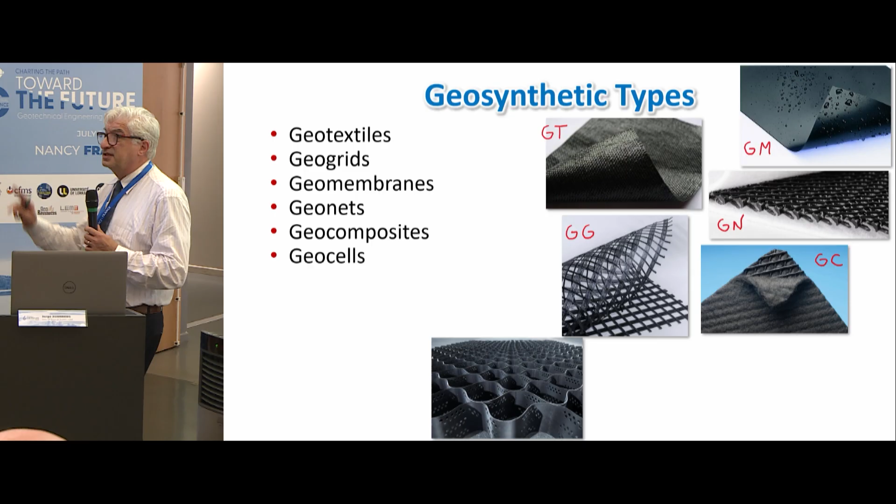Geotextiles: this is a textile, but if it is not used in a geotechnical project, it's not a geotextile, it's just a textile. A geotextile is an industrial textile, and what makes it a geotextile is that it's used in geotechnical projects. Geogrids, geomembranes. I'm not going to tell you what they are, I'm just going to tell you their names. Geonets. Geocomposites, more than one geosynthetic in a single product. Geocells, probably one of the few non-two-dimensional geosynthetics. Geosynthetic clay liners, composites of geotextiles with bentonite, erosion control products, and many others.

In addition to the geosynthetic types, I need to tell you about the geosynthetic functions. And this is key. This is key to the understanding of geosynthetics, and I believe that is another important contribution that geosynthetics may bring to geotechnical engineering at large and to the understanding of soils. What are the geosynthetic functions? This is what we are going to use geosynthetics for.

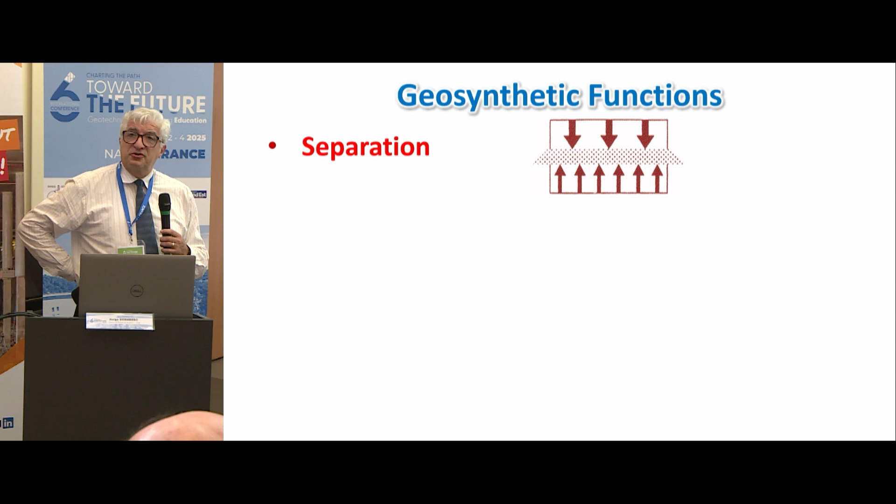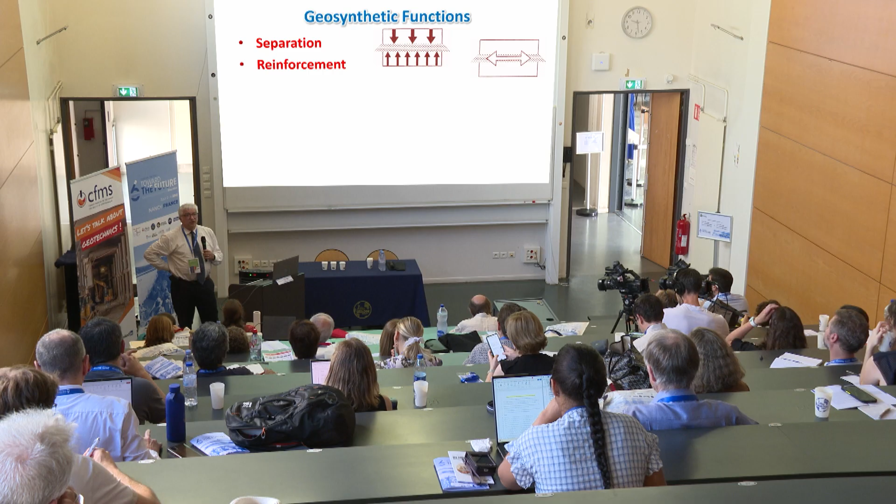We can talk about some mechanical functions of geosynthetics, including separation. We are going to use geosynthetics to keep different materials, different geomaterials, different soils separate. And reinforcement: we're going to develop tensile forces in order to minimize problems related to stability. And stiffening: we're also going to develop tensile forces, but in this case to control deformations. And then we get into the blue geosynthetic functions, the hydraulic ones.

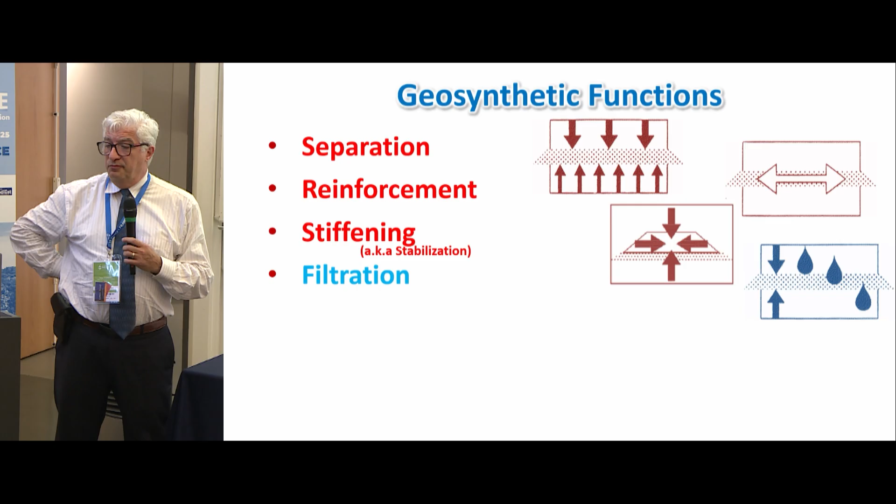We're going to talk about filtration. In this case, we're talking about flow across the plane of the geosynthetic. We want water to get through very easily, as in any filter, as in a granular filter. We do not want particles to go with it. And barrier, we want to prevent the infiltration of water. And drainage, we want the flow of water within the same plane of the material. And protection, we want to minimize problems associated with defects from the contact of two materials. For example, a gravel in contact with a geomembrane, we need to protect it from defects. All right, so we talked very briefly about types of geosynthetics and their functions.

So I want you to get to a survey before telling you that we need to get a better exposure of geosynthetics at the undergraduate level. I want you to get into a survey on how much of this we're already doing. But before knowing how much we are exposing undergraduates to geosynthetics, I had to understand what is the structure of geotechnical engineering in civil engineering programs.

So before telling you about geosynthetics, I'm going to tell you something broader, and that may be relevant for many of us in this conference, which is, where does geotechnical engineering fit within civil engineering? So I conducted a survey, and the goal was how geosynthetics are taught, but we are first going to get into how geotechnical engineering is taught.

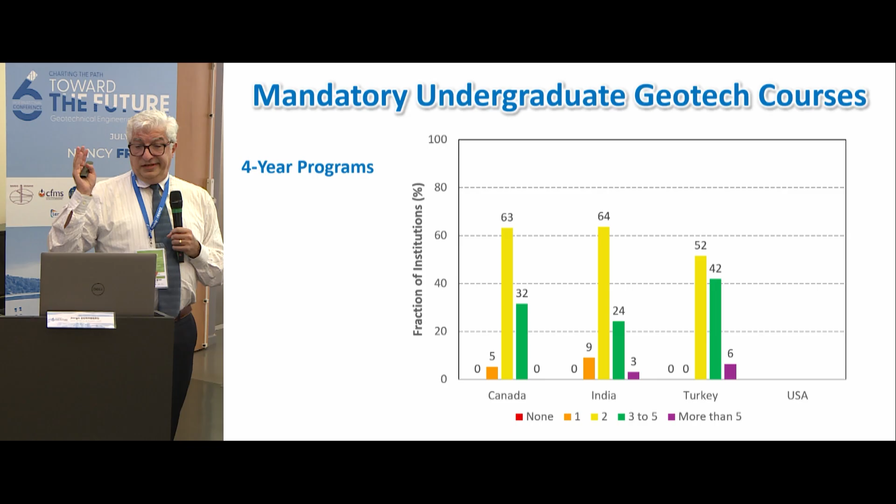Then we get to Turkey, even better, because essentially 100% offer at least 2 mandatory courses in geotechnical engineering. And the big problem is the US. In the US, I consider it staggering. A staggering 7% of institutions do not offer mandatory geotechnical engineering courses to their students. So, a student may graduate as a civil engineer without receiving any exposure to geotechnical engineering.

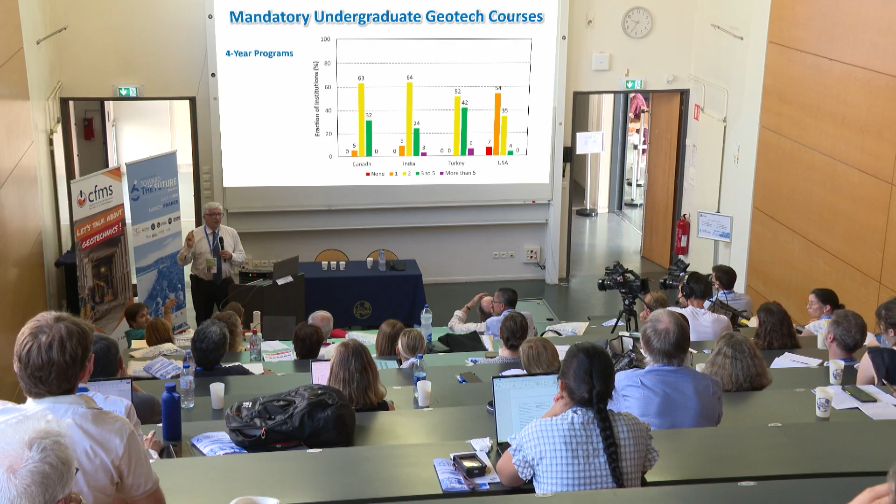The rest, 54%, the great majority, receive 1 mandatory course in geotechnical engineering, and then we have 2. This is 4-year programs. Let me show you, again, mandatory courses, but now in 5-year programs.

As a reference, I'm showing you here, there. How does this work? Here. Here. So as a, no.

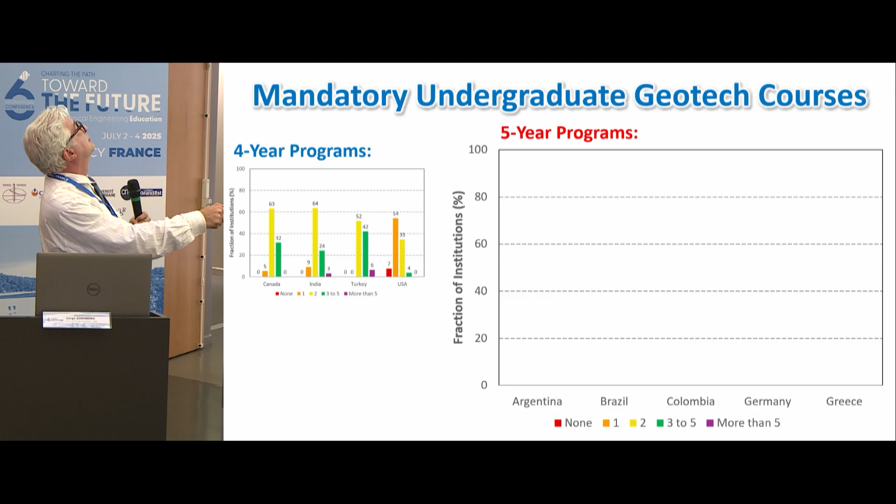Okay. You have as a reference a previous graph. And now I'm going to show you the 5-year programs. So Argentina, 5-year programs, but not significantly better coverage in terms of mandatory courses in geotechnical engineering. 58% teaches 2 mandatory courses in geotechnical engineering. Much better in Brazil, 56% or more, and Colombia offer 3 or more mandatory geotechnical engineering courses. When it comes to Germany, we're again back to 2, which is not that different in terms of mandatory exposure to those in 4-year programs.

And then the outlier is Greece. The outlier is sometimes in the good sense, sometimes you're going to see in the very bad sense. 100% of the programs surveyed in Greece offer at least 3 mandatory courses in geotechnical engineering. Okay, so here I'm going to just regurgitate a little bit what I just showed you. So there is a predictable but clear pattern. Programs with longer duration tend, but not necessarily do have, more mandatory courses in geotechnical engineering. Sadly, some four-year programs even lack a single mandatory course in geotechnical engineering.

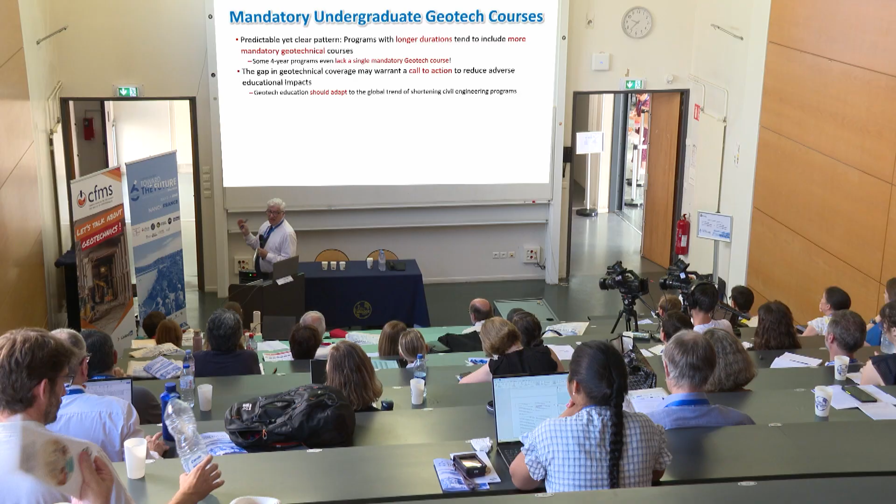Now, I would contend that we cannot fight, and also in my informal review, I believe that many countries are going from 5-year programs to 4. Some countries have gone from 6 to 5. The tendency is to shrink the length of the civil engineering program. And we cannot reverse that. I could say, rather than fighting that, as geotechnical engineers, we need to adapt. So we need to adapt to the trend of decreasing the length of civil engineering programs.

And this shift is irreversible, but certain topics need, and maybe I'm back to the concept of threshold that Jennifer was mentioning. What is the minimum that we expect civil engineers to receive in terms of geotechnical engineering, including some subspecialties within geotechnical engineering, such as geosynthetics? Okay, so this is mandatory. To be fair, but it's more difficult to interpret, I'm going to also show you data on the elective. A number of elective courses in geotechnical engineering, but this is harder to interpret without keeping in mind, in context, how many mandatory courses have been observed. But I think that we can draw some conclusions.

Elective undergraduate geotechnical courses in Canada, I could say a dual, either almost nothing, no additional geotechnical courses, or potentially more than 5 additional technical elective courses. A fair amount, a healthy amount in India. We're in 4-year programs, so we're compensating for the small number of mandatory courses. In Turkey, also a healthy number of electives, and also in the US. Quite similar pattern in all 4-year programs in terms of elective geotechnical engineering courses.

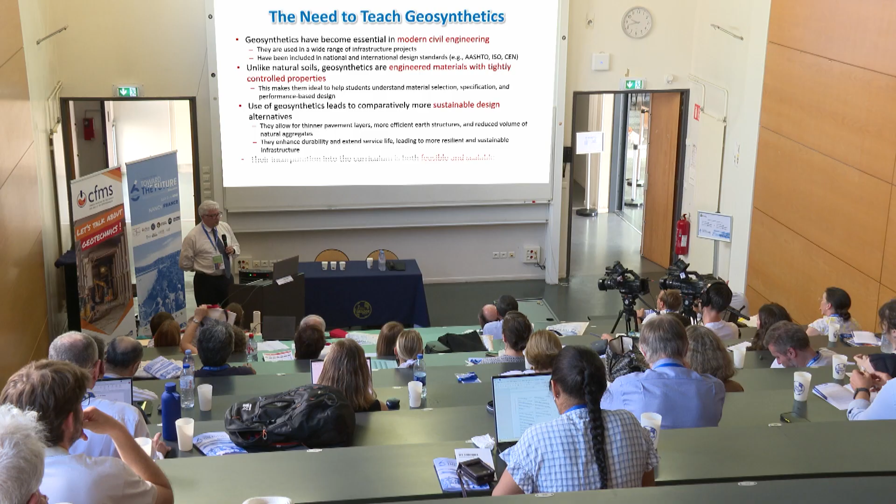It could be argued that the topic of sustainability is more and more important, and there is a lot of research indicating that when using geosynthetics, we end up using less aggregate, thinner structures, and consequently, typically, a lower carbon footprint than alternative solutions not using geosynthetics. And I could say that we're not talking about something that cannot be done. It's definitely feasible, and I will show you some examples. And it's scalable. By scalable, I mean that you can offer just very little or decide to offer more. But it's very doable, and you can choose what is the right size and fit for your program.

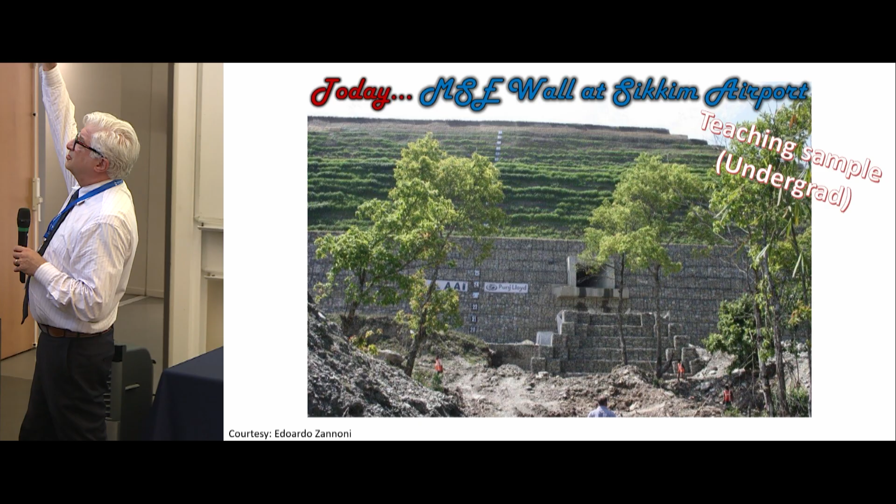So, for example, from time to time, I'm going to show you teaching samples of slides that I use in my courses. For example, I tell my students that the use of geosynthetics in geotechnical projects can be in extremely important projects. What I'm going to show you here is what I understand is the tallest geosynthetic reinforced wall in the world. It's in Sikkim Airport in the Indian Himalayas. And we're talking about a structure that is 80 meters tall, 80 meters tall. And it's so tall that it's even hard to take a good picture of it.

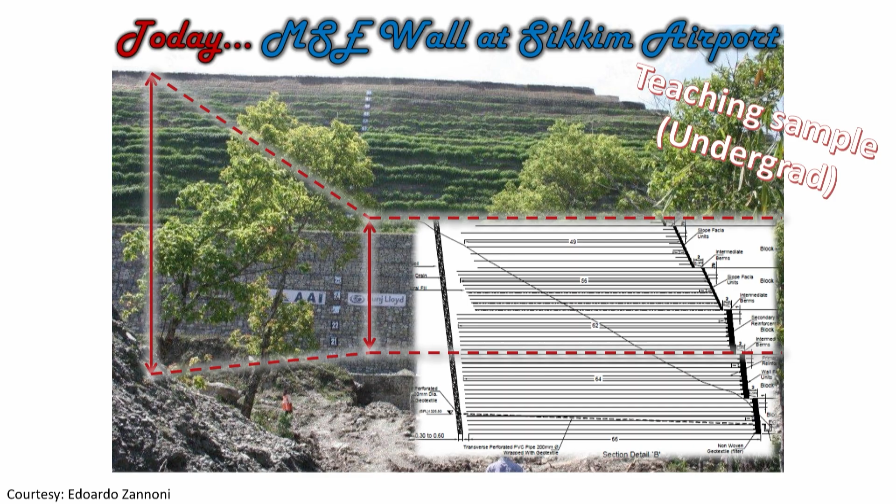So for example, here we see in this picture 3 terraces of the retaining structure. What you do not see is that there are 2 additional terraces that I'm not showing you here. And what you also do not see is that this picture was taken during construction, so there are 3 additional terraces in this structure. A massive retaining structure. Again, as far as I understand it, it is the tallest reinforced soil wall in the world.

First, I just mentioned curriculums tend to shrink in length, and the number of topics that we are necessarily adding continues to increase. So I could say that, okay, since I'm struggling with what to fit, an easy cut is not to teach new stuff. Never mind that the new stuff is very relevant, but I need to cut stuff. So the first thing to cut are the newcomers. And I could contend that that's not necessarily the right approach.

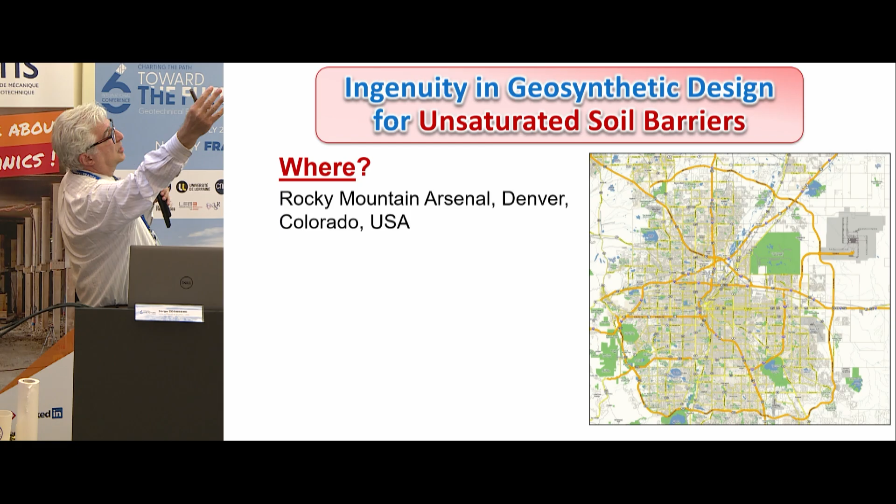Okay, what I'm showing you here is the Denver metropolitan area. On your upper right, northeast, you see the international airport. There are many different ways in which you can say this is the largest airport in the US. Denver claims to be the largest in terms of size, area, footprint.

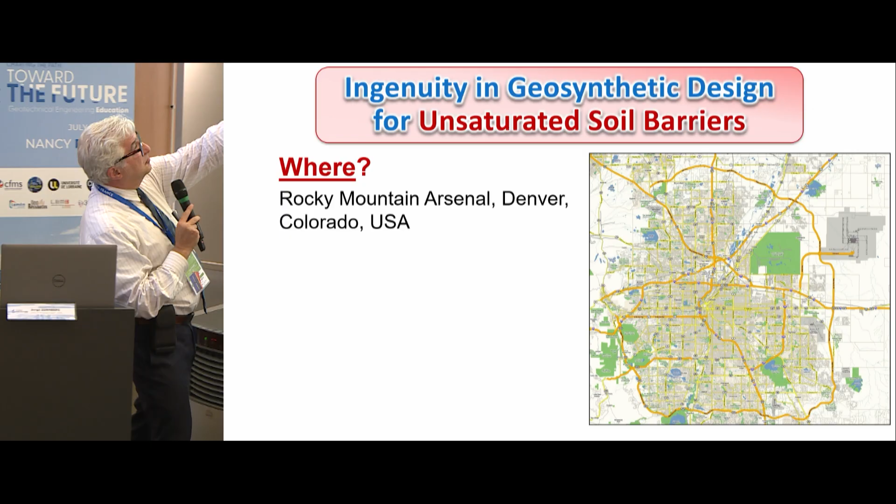And the other big patch that you see is this green patch. That's the Rocky Mountain Arsenal, and I'm going to be talking about a barrier for the Rocky Mountain Arsenal. And what was the challenge? To transform this Rocky Mountain Arsenal, a big area, into what is now the largest urban wildlife refuge in the US.

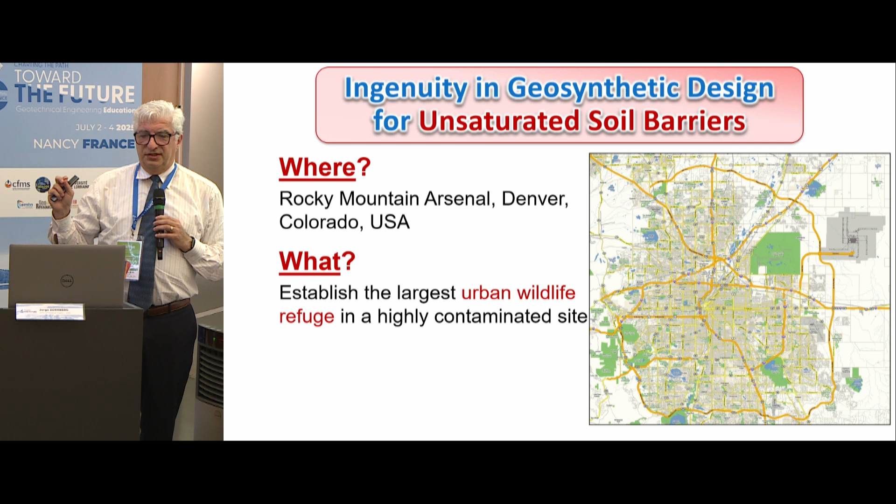But it's a highly contaminated site. How? And this is a trick. Part of the solution involved using geosynthetics as capillary barriers to enhance the ability of the cover systems. We're going to encapsulate hazardous waste, and we do not want water to infiltrate into the hazardous waste. And we're going to do that by characterizing these under unsaturated conditions, including using a capillary barrier.

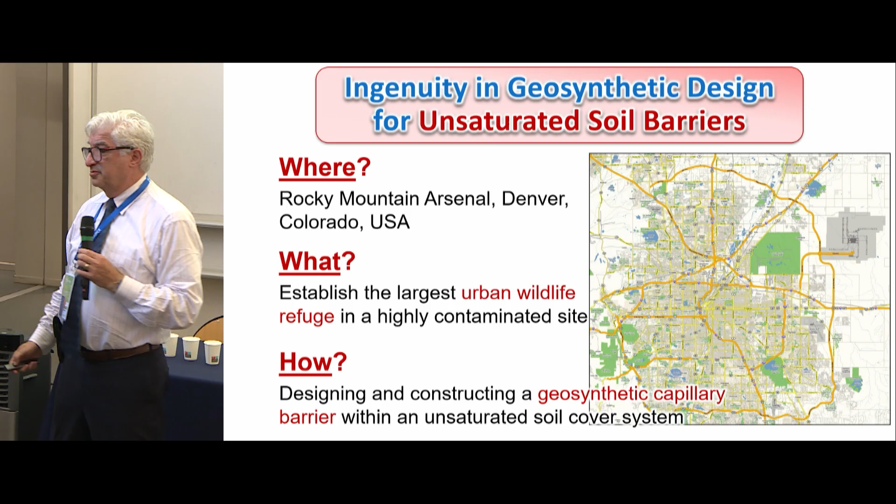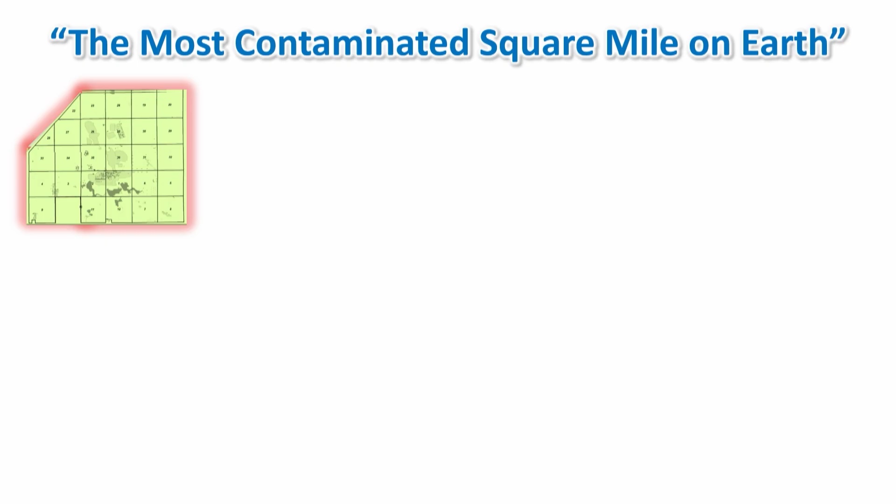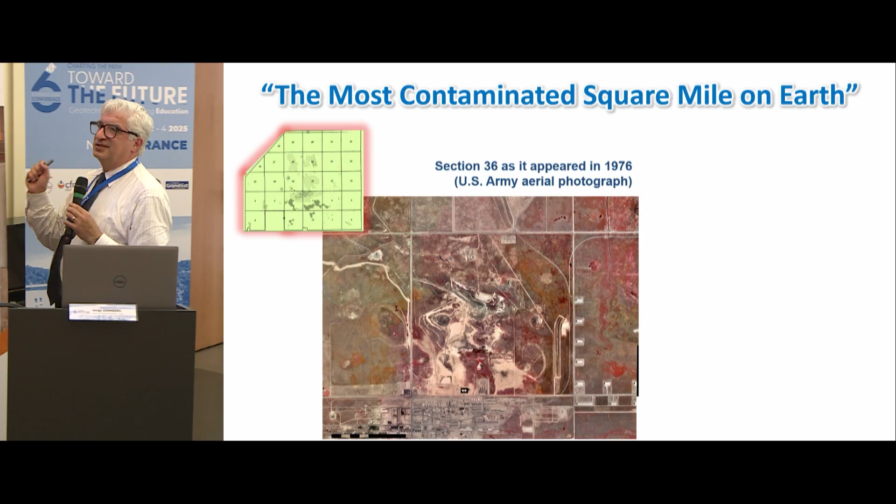So this is a huge area, almost 70 square kilometers. And why is this important? Well, these are 27 square miles. One of those square miles at one point was identified as the most contaminated square mile on Earth. This is the site where, months after Pearl Harbor, the US initiated the manufacturing of chemical weapons, sarin gas.

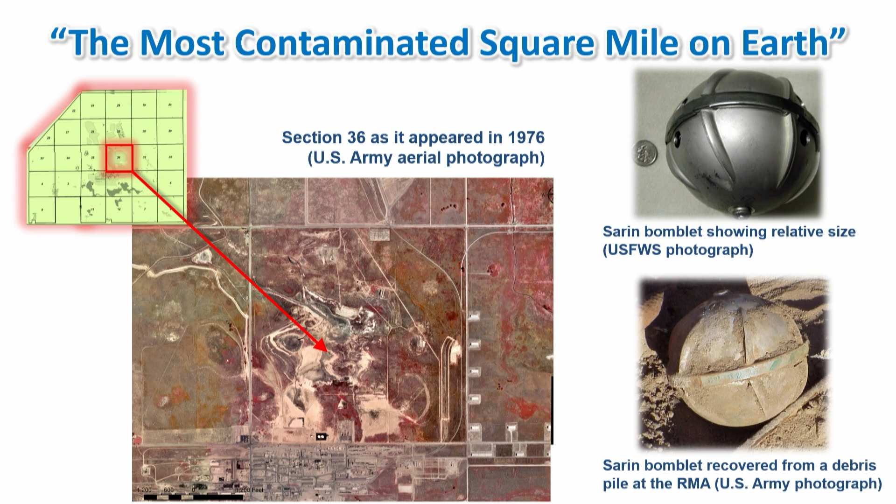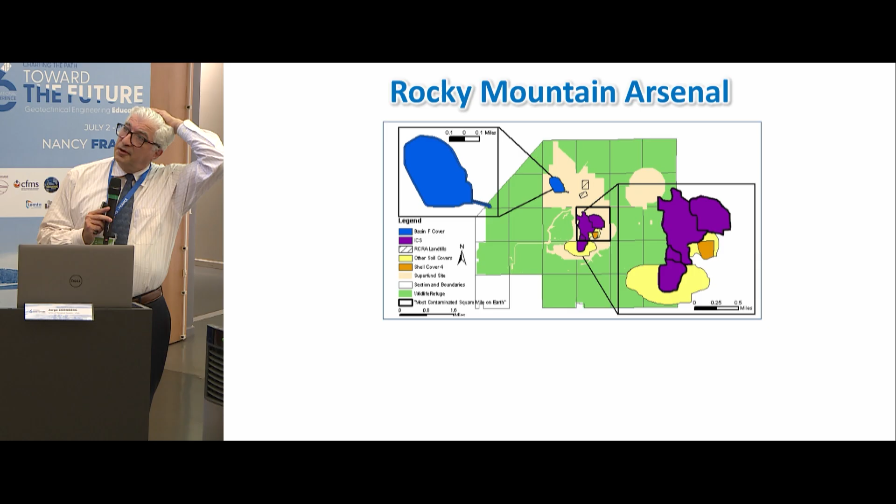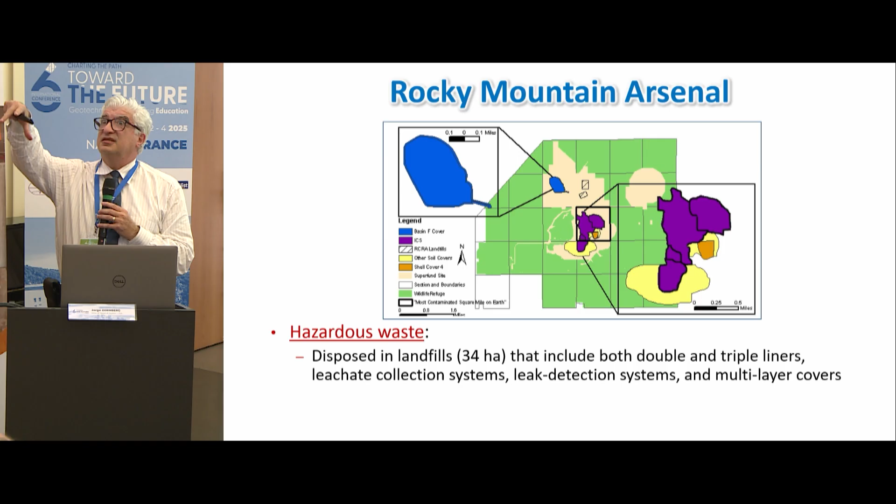So I'm going to talk about the remediation of this site, and during the remediation, sarin bomblets were identified even at that point. There are many different projects within this site that were part of this major project, including hazardous waste containment facilities, triple-lined hazardous waste containment facilities that were constructed on site.

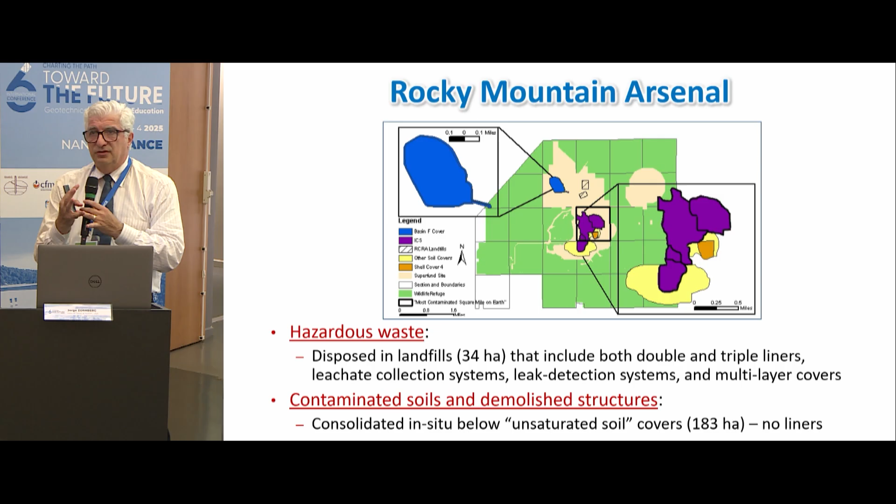But the one that I'm going to focus on the most is after all the hazardous waste was consolidated into hazardous waste containment facilities, the soils were contaminated. Huge areas were contaminated. And these soils had to be covered. Denver is a semi-arid area, so the concept of evapotranspirative covers was considered. What is an evapotranspirative cover?

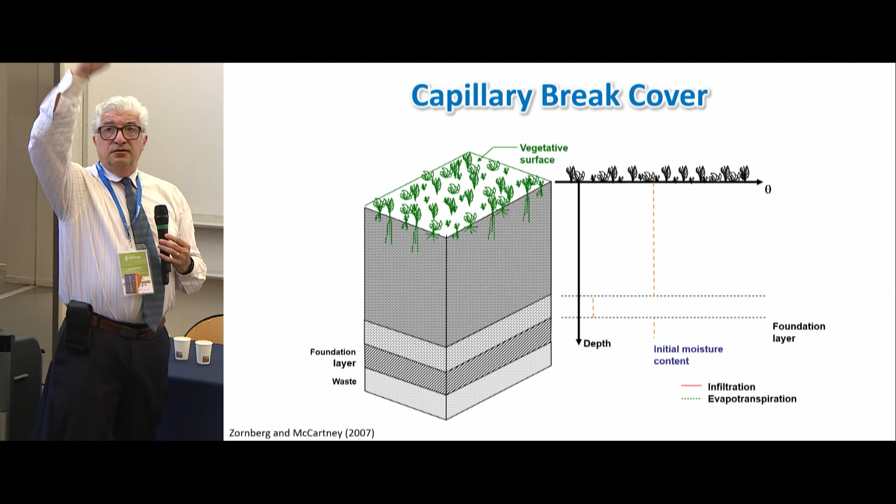It is essentially letting water come from the sky, and the water under unsaturated conditions starts to infiltrate, but before the infiltration front reaches the waste, evapotranspiration comes in a dry season and removes that back to the atmosphere. That's an evapotranspirative cover. But that was not enough. So instead, we needed additional sources for storage.

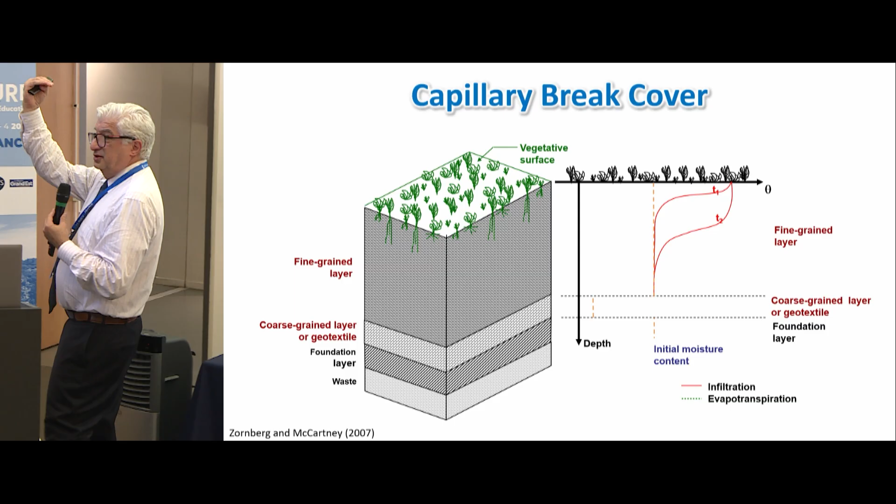What I'm showing you here is, in the vertical axis, depth, in the horizontal axis, volumetric moisture content. So during the wet season, the moisture increases on the surface, and you see an advancing moisture front, and it reaches the base of the cover. So in principle, this is failure if this was an evapotranspirative cover. But it's not. It's a capillary barrier. So there is additional storage capacity under unsaturated conditions. Essentially, we create a barrier with unsaturated conditions.

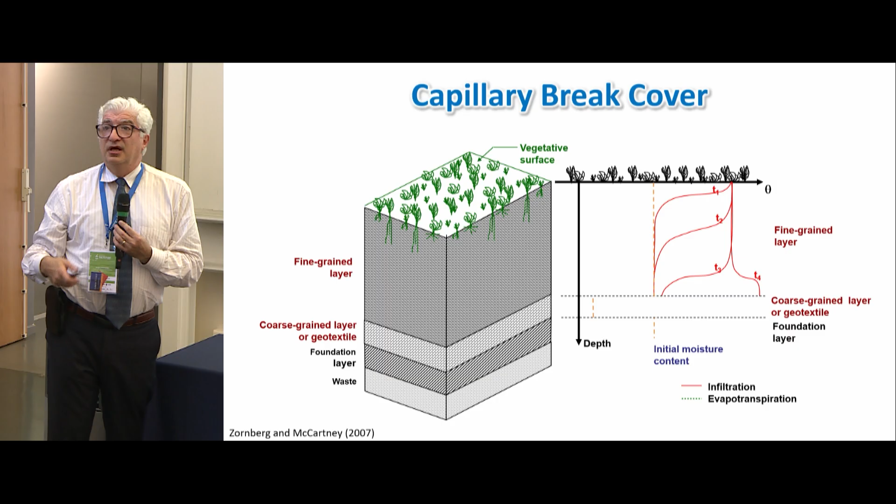And in here, I'm showing you a coarse-grained soil or a geotextile. The same way that coarse-grained soils, gravel, under unsaturated conditions are barriers to clays, the same goes with geotextiles. Their open pore structure creates a capillary barrier that allows additional moisture accumulation in this system before, now in the green profiles, the moisture recedes once the dry season comes back.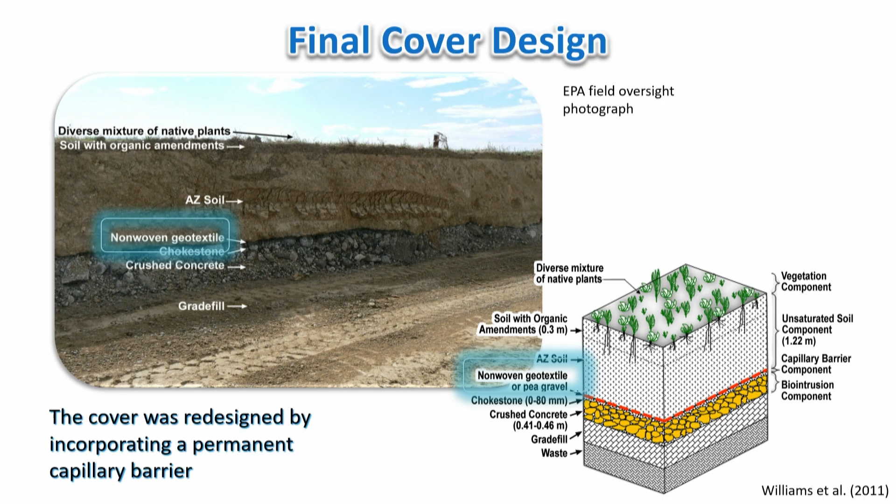And here's a view of the cross-section, quite a complicated cross-section, but among the different components, I'm going to highlight a non-woven geotextile that works as a capillary barrier to promote the storage capacity of the system.

So the next time that you go to Denver and you come back from the airport and there's nothing over there, there is something. You drive and you see nothing. You're driving by the Rocky Mountain Arsenal, and you can get in right now and get to appreciate bison. And actually, the importance of this site is that you see Denver in the background.

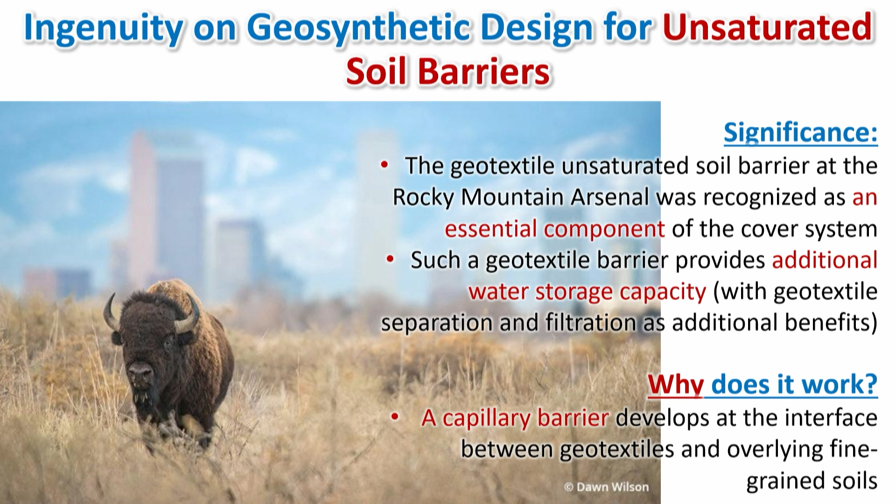So what is the significance? The geotextile unsaturated soil barrier was recognized as an essential component in the cover system. This increased the storage capacity. And why does it work? Because of the contrast in pore sizes that can be offered by clean granular materials, or in this case, by the open structure of geotextiles.

Okay, I gave you one example of a case history to show you the appeal, again, in an unsaturated soil problem. Let me show you another unsaturated soil problem, but the opposite. Instead of talking about a barrier, I'm going to focus on a drain, to drain water under unsaturated conditions. I'm going to show you another case, the Daniel Boone Bridge in Missouri.

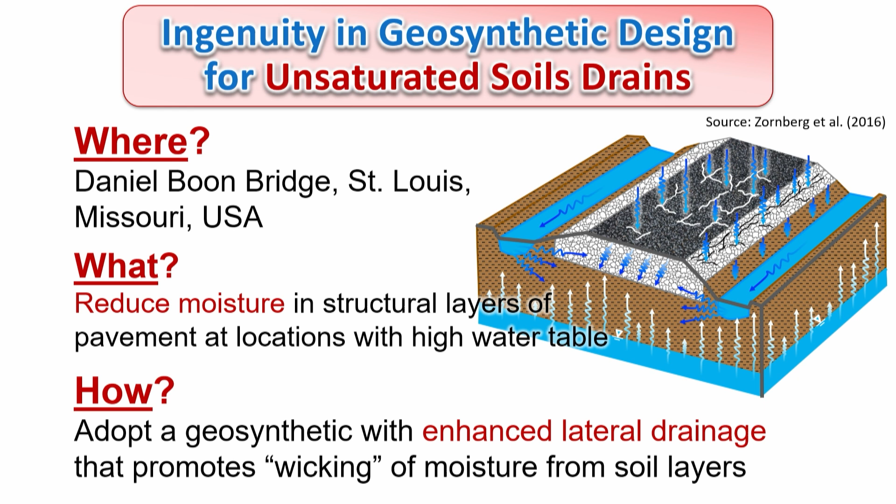Essentially, the problem here was a very high water table. There was a bridge and an approach road that had to be constructed, and capillary moisture reached the structural cross-section of the road, and this is not good. Water is not good for structural capacity in roadways, so this had to be drained. There are many different sources of water, but in this particular case, we are going to focus on water coming from the groundwater and reaching our site by capillary rise.

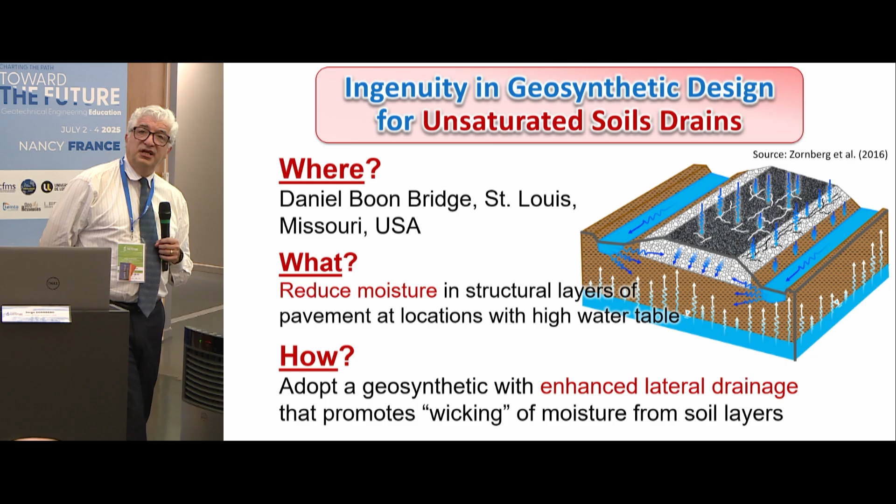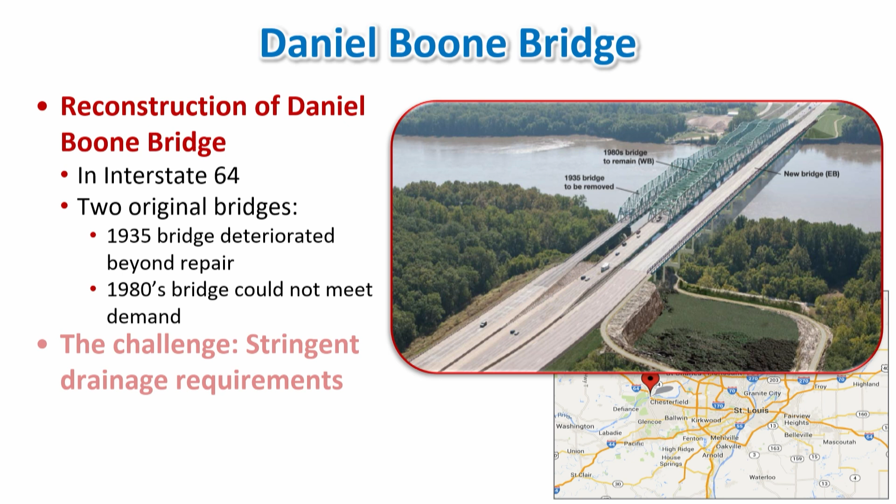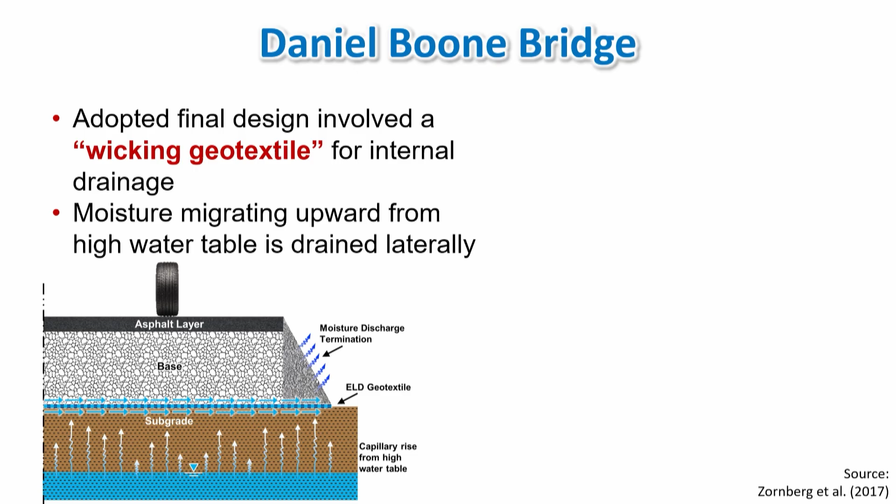How it was solved using what is called a wicking geotextile. I'm not going to get into the details, but after evaluating many different structures, this was to reconstructing a bridge in the Missouri River, and essentially there was a high water table, and this is a cartoon of the solution. The idea is that water reaching the structure from the water table would reach this wicking geotextile, and this could drain under unsaturated conditions to the edge of the structure, maintaining the integrity.

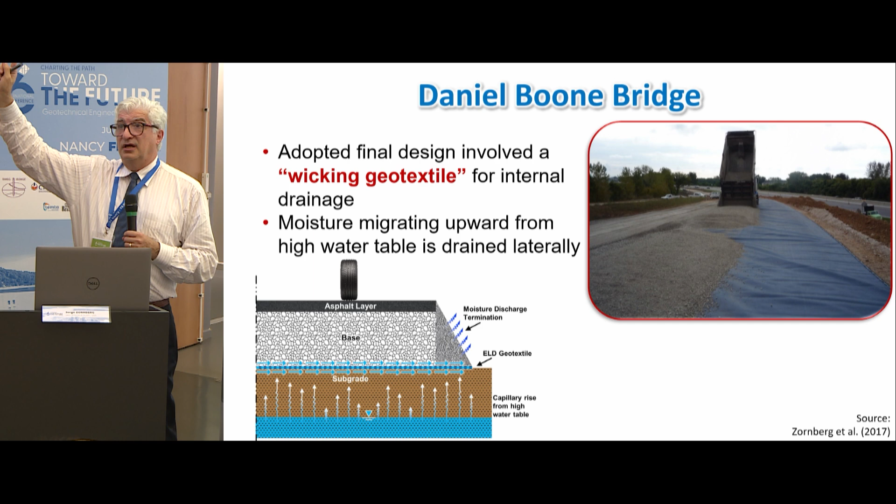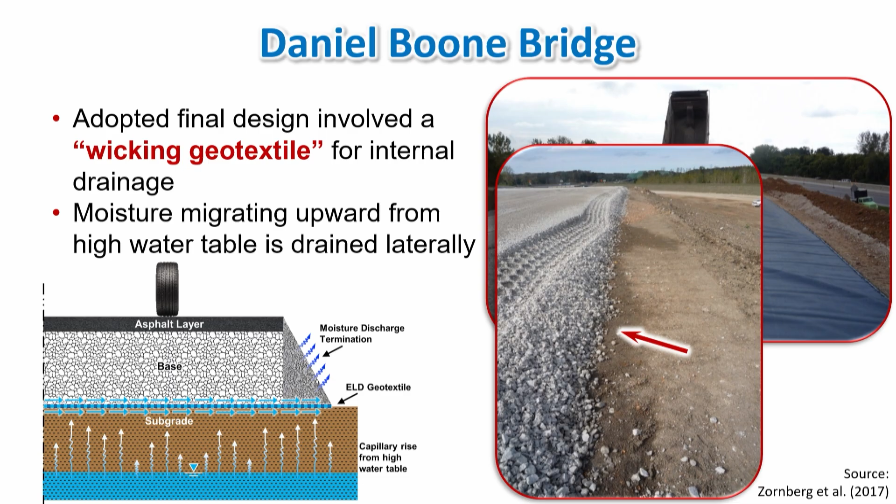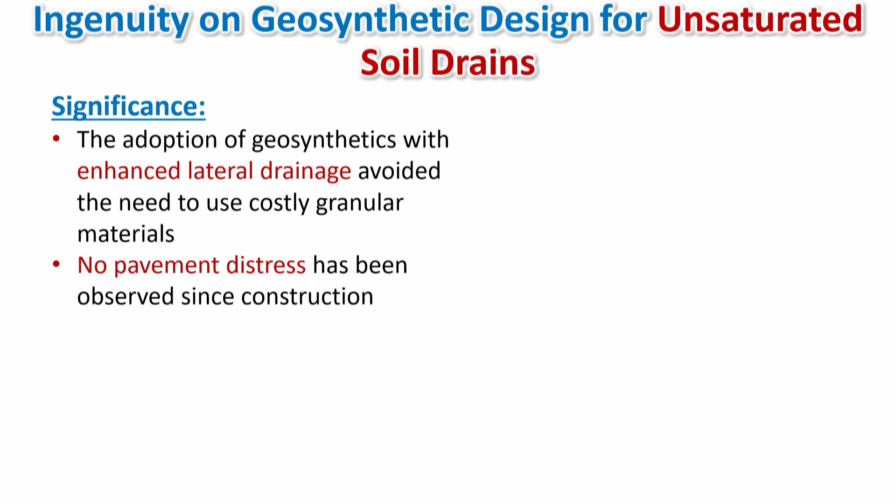Again, draining water under unsaturated conditions is tough. Draining free water is easy. You just put a drain. Draining water under unsaturated conditions is very tough. But here we have a view of the construction, and here you have a view, even during construction, of how this water was draining. So, I didn't tell you how this works. So the significance was that the adoption of geosynthetics with enhanced lateral drainage avoided the need of costly granular materials. The structure is performing very well.

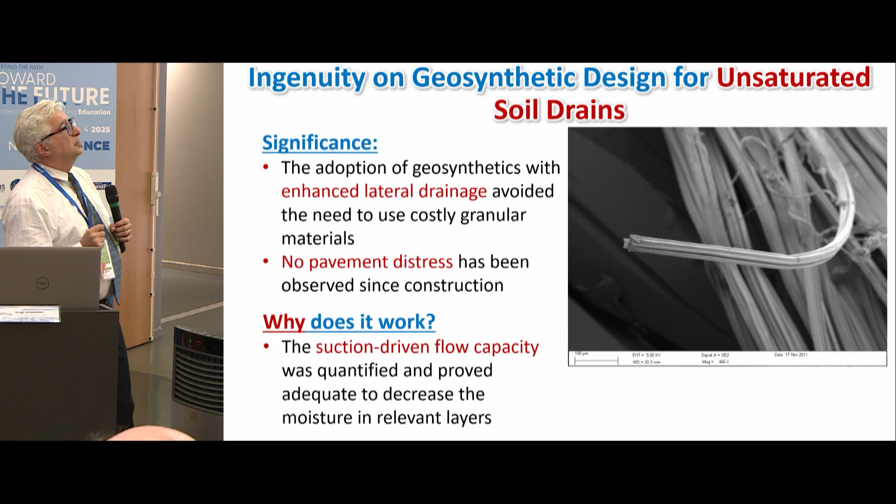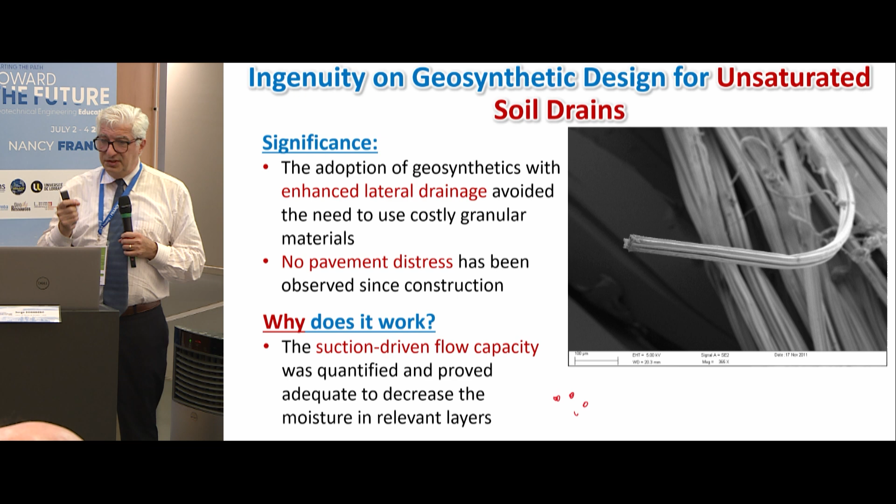Why does this work? Well, there is a new concept in the geosynthetics community that is called suction-driven flow. What is this? Here you see an electron microscope of the fibers. These are not circular fibers. These are not rectangular fibers. These fibers have grooves. These are hair-thin fibers. So what you see here is typically the way that geotextiles are made. This is a geotextile sample, you're going to have a number of yarns.

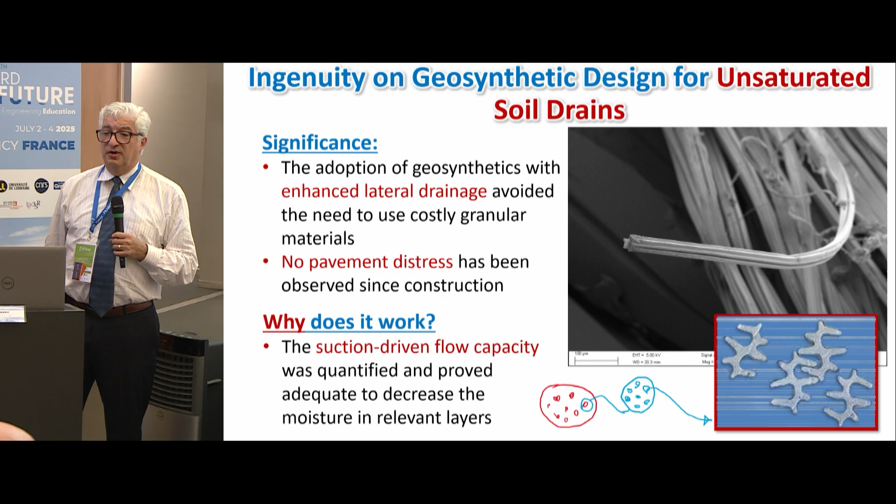That's not the flow that I'm talking about. Within each yarn, we have a number of fibers. That's not what I'm talking about. It is within each fiber, we're going to have a number of grooves. Under saturated conditions, all the pores are going to be filled with water. That's not what we're talking about. What we're talking about is draining water by capillarity, the very basic concept of capillary tubes, but in this case it is capillarity through the grooves of the fibers.

All right, so two examples to illustrate the appeal of geosynthetics, promoting innovation and ingenuity in the design of geotechnical projects. But in addition to that, I could argue that geosynthetics can also strengthen core geotechnical concepts. And this comes back to the concept of functions. Soils have different functions when we use them as construction materials, but we do not think of them as having functions. We talk about properties, but we do not group the properties into functions, which is what we do in geosynthetics. And this is a concept that we can borrow, particularly when using soils or geomaterials in general as construction materials, which is an enormous fraction of the geotechnical projects that we have.

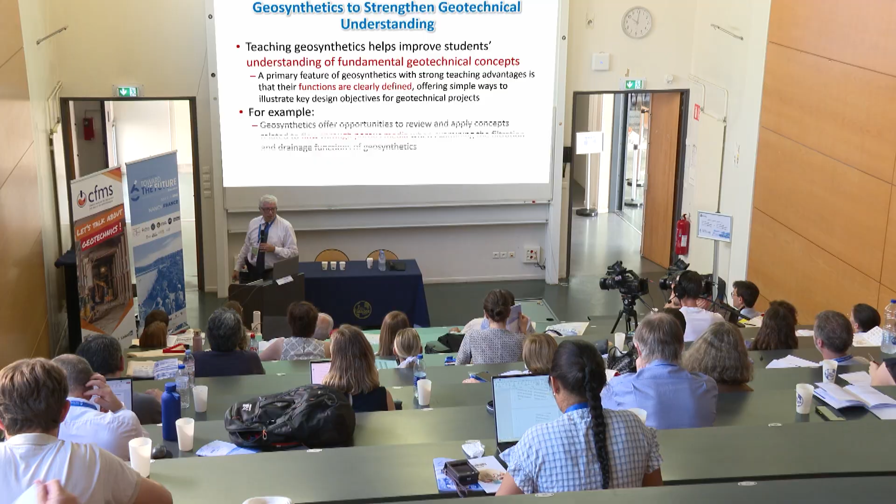I recognize that a big fraction of the projects that we do as geotechnical engineers is subsurface investigation. That's not what I'm talking about. I'm talking about the use of geotechnical materials as construction materials, to build dams, embankments, roadways, retaining walls. For example, how are we going to strengthen the knowledge of flow through soils? And I'm going to get back to this topic again, the learning about reinforced soil interaction can help us understand the shear strength of soils.

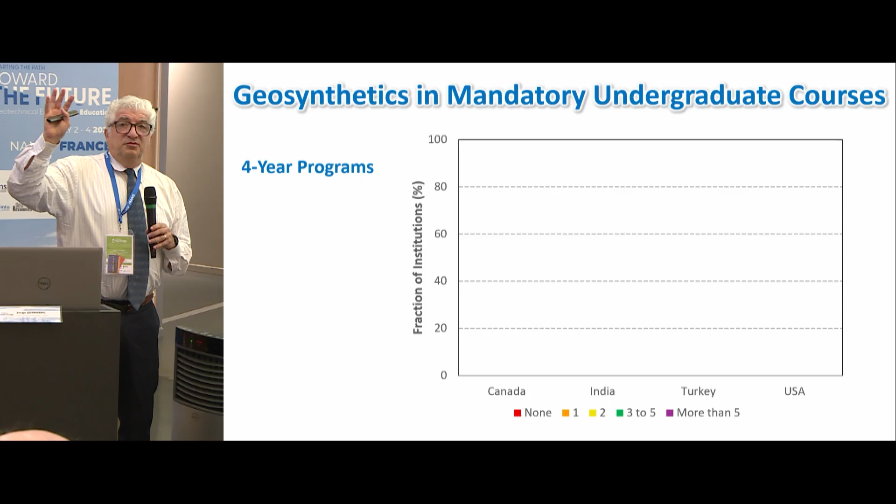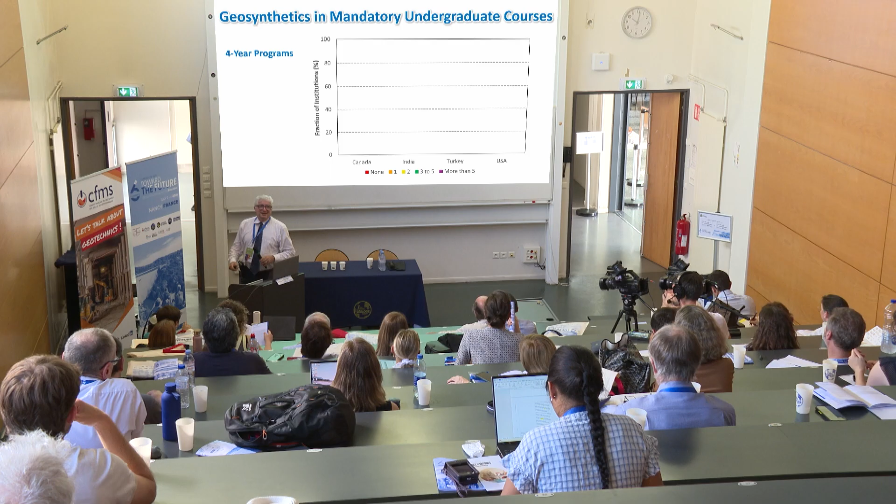After going over why we teach geosynthetics, let me go back to the survey. We learned about the structure of geotechnical courses in civil engineering programs. Now let me go deeper and tell you about the coverage of geosynthetics in those geotechnical courses. And I'm going to start with the coverage of geosynthetics in mandatory courses. Some heads up, it's terrible.

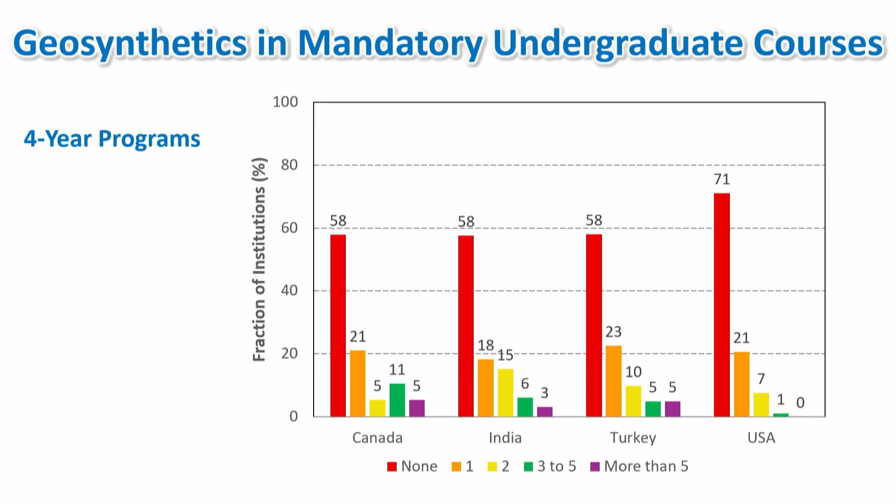So in Canada, over 58% of the mandatory geotechnical courses do not have a single hour of exposure to geosynthetics. Over 58% in India, over 58% in Turkey, over 71% in the US. Again, red is bad. Red means no exposure to geosynthetics in mandatory courses at all. Okay, I hope we do better in 5-year programs. After all, we have an extra year to graduate our civil engineers.

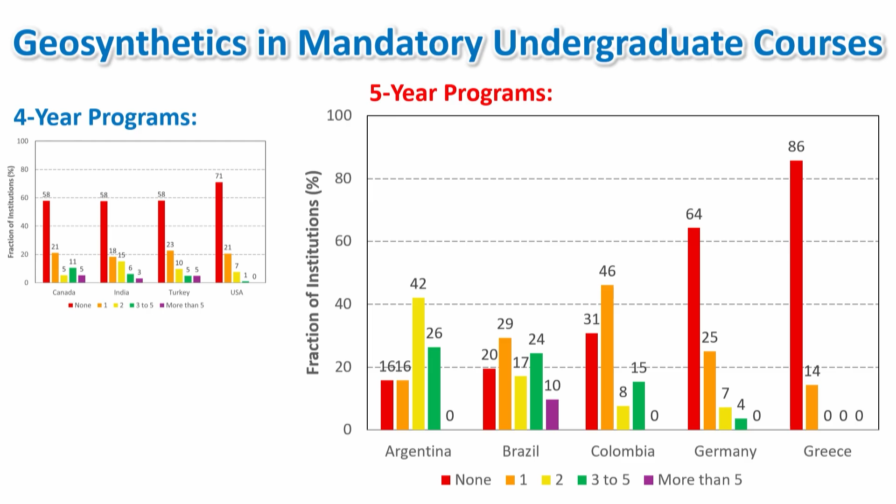Mixed. So Argentina, definitely better. At least a couple of hours of geosynthetics in mandatory courses. In Brazil, 80% of institutions offer mandatory courses that cover geosynthetics. And then the bad guys, at least in the context of this research, Colombia, very little exposure. Red means no exposure at all. Germany, no exposure at all in mandatory courses. Greece did great in terms of number of geotechnical courses, but 86%, in spite of the healthy number of mandatory courses, do not cover a single hour of geosynthetics. All right.

So this essentially tells you back what I just mentioned, so I'm not going to spend time on this, but the coverage of geosynthetics in mandatory courses varies. In 4-year programs, the coverage is minimal. In 5-year programs, there is a more diverse pattern, but essentially I would call it unsatisfactory.

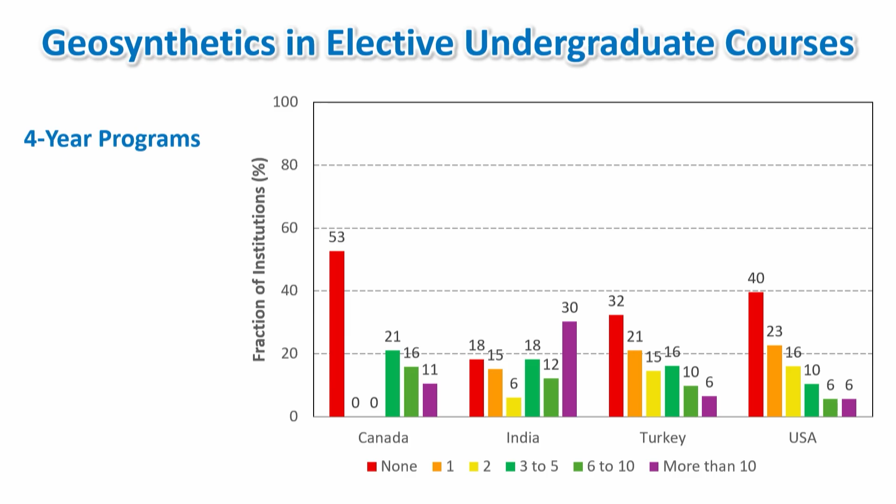I could say that an important message, at least out of this, is that the length of the geotechnical program was not a good predictor of the coverage of geosynthetics. I'm going to go very quickly over the elective undergraduate courses, just to tell you that the presence of elective courses in 4-year programs did not necessarily improve the picture, or at least not significantly.

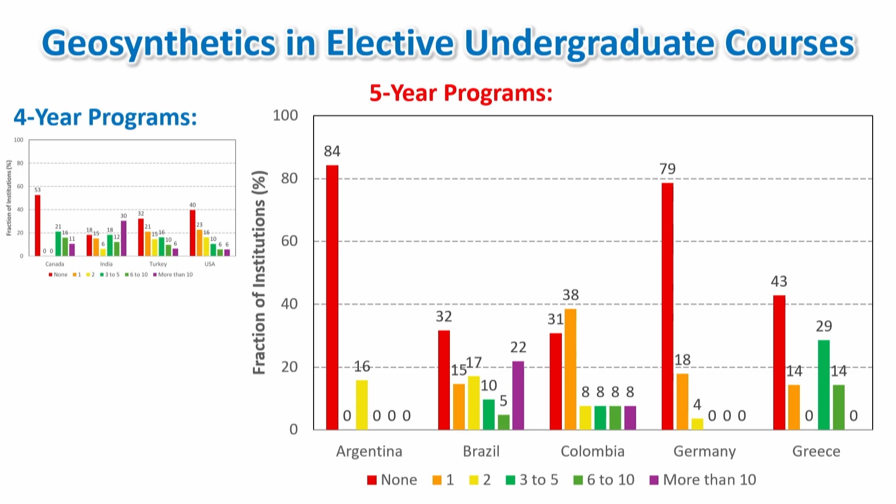And the same goes for 5-year programs. Definitely, the elective courses did not necessarily improve the picture. Some, but definitely not an important or significant additional exposure. So essentially the message is that elective courses do not compensate for the lack of coverage of geosynthetics in mandatory courses.

There is a program that I'm not going to walk you through, but that tries to compensate for at least one of the potential deterrents for teaching geosynthetics, which is a potential lack of faculty familiarity, and that is a program by the International Geosynthetics Society called Educate the Educators.

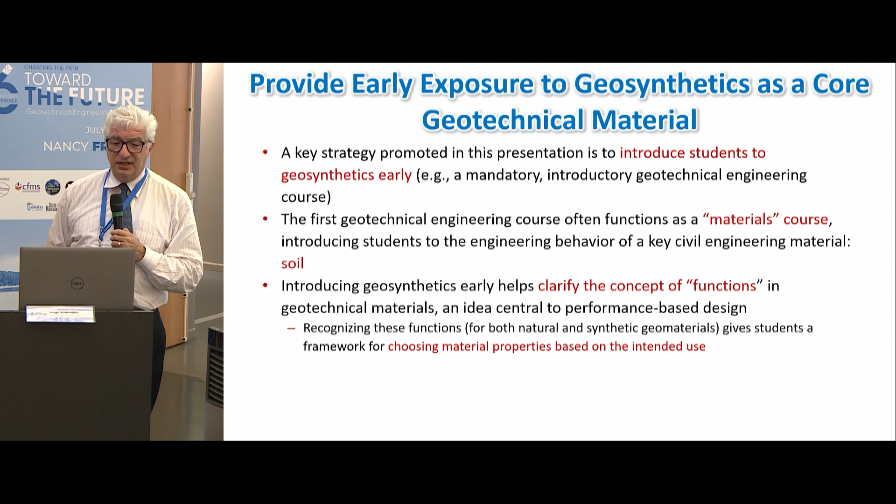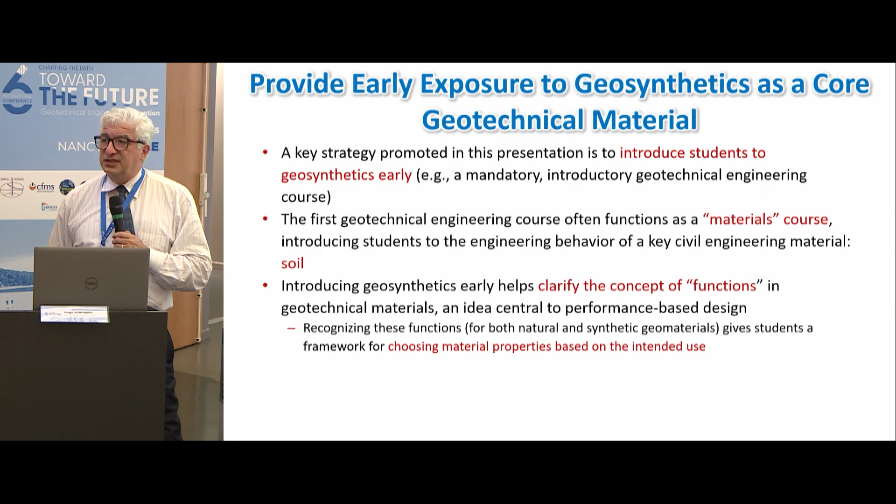A key strategy promoted in this presentation is to introduce students to geosynthetics early. This is to cover the material aspects of the geosynthetics content. This brings the benefit of clarifying the concept of functions in geotechnical engineering, which essentially helps guide how we choose not only geosynthetics but also soils based on their properties and their intended use.

I would say that the coverage of geosynthetics brings the opportunity to emphasize the concept of geomaterials as construction materials. This is a concept that students may not fully appreciate, thinking that geotechnical materials and soils in general are about the characterization of in situ soils. And particularly, students may be surprised to recognize how much of the infrastructure is built using geomaterials as construction materials.

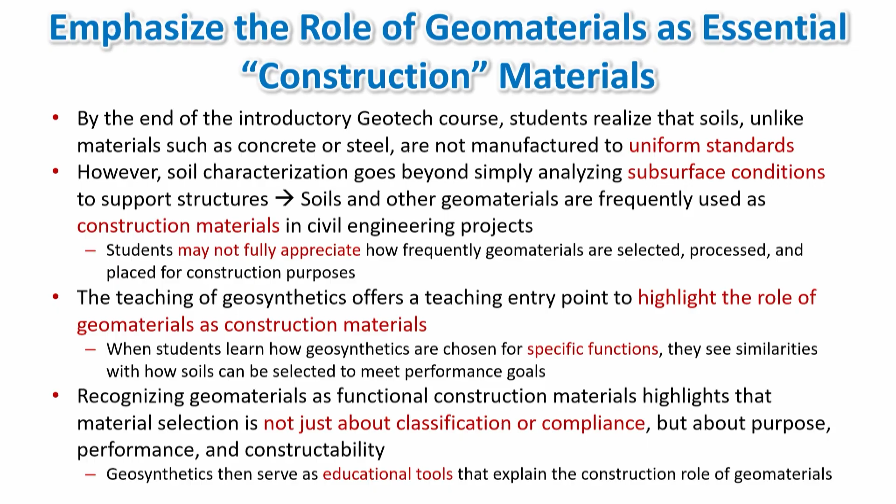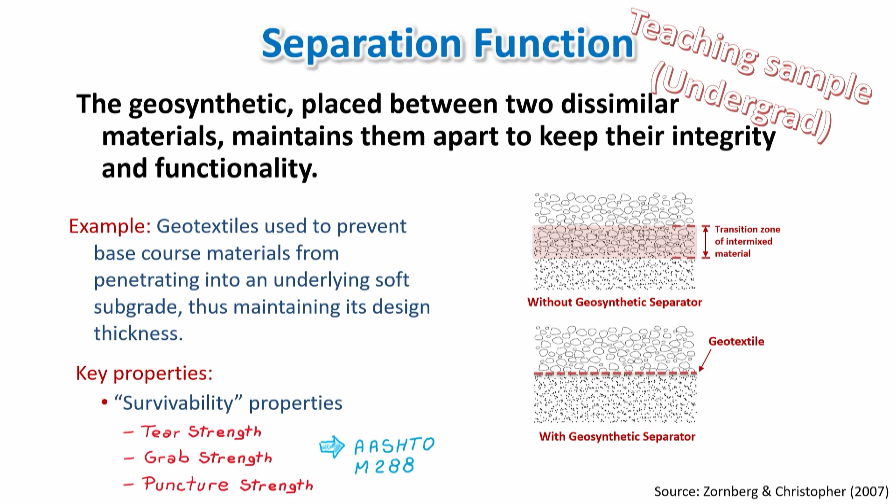So the characterization of geomaterials is not just about their classification and compliance, but also their selection, placement, and use in the built environment. Here are the illustrations, slides that I present, for example, to characterize the function of separation. That is not a function that soils have, but it allows conveying how important it is in some cases to keep dissimilar materials separate.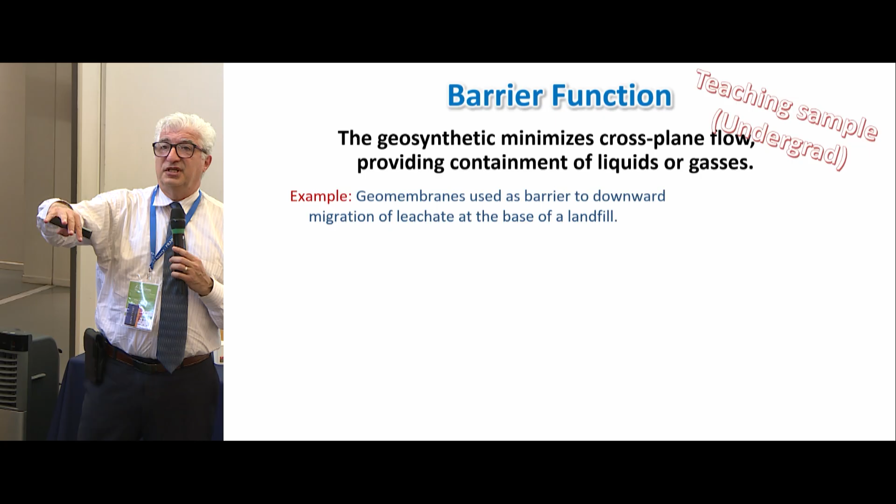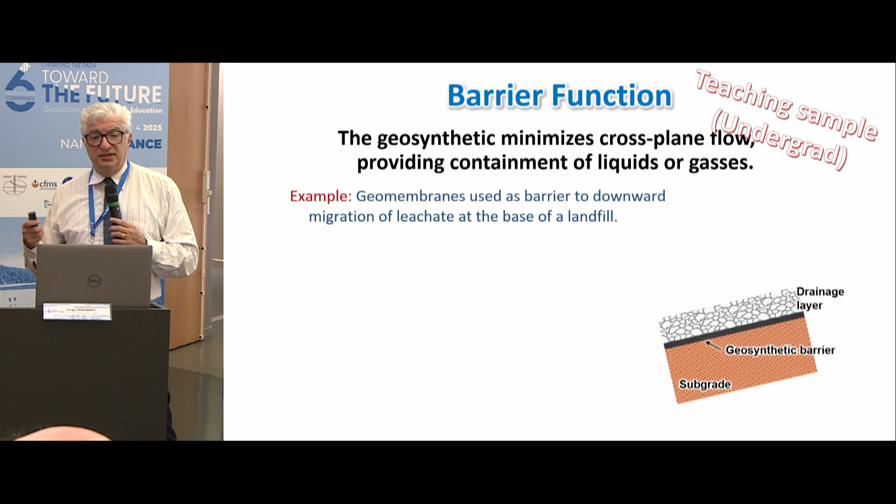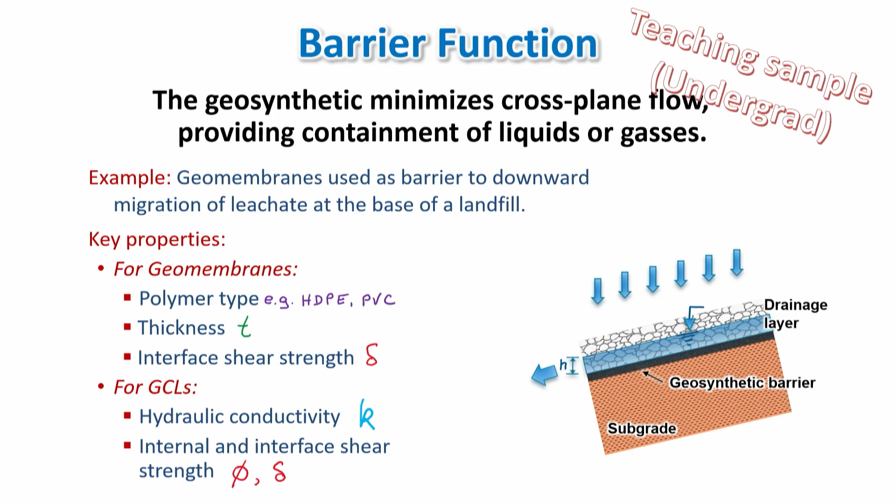Or the concept of clays, not only identified as in situ materials that we covered when studying consolidation of clays and settlements, but also their selection as barrier materials. And in this case, complementing that with the use of geosynthetics as barrier materials and characterizing the properties that we may need. We may draw parallels with concepts already covered in our introductory geotechnical course, for example, Darcy's law, when we get back to geosynthetics.

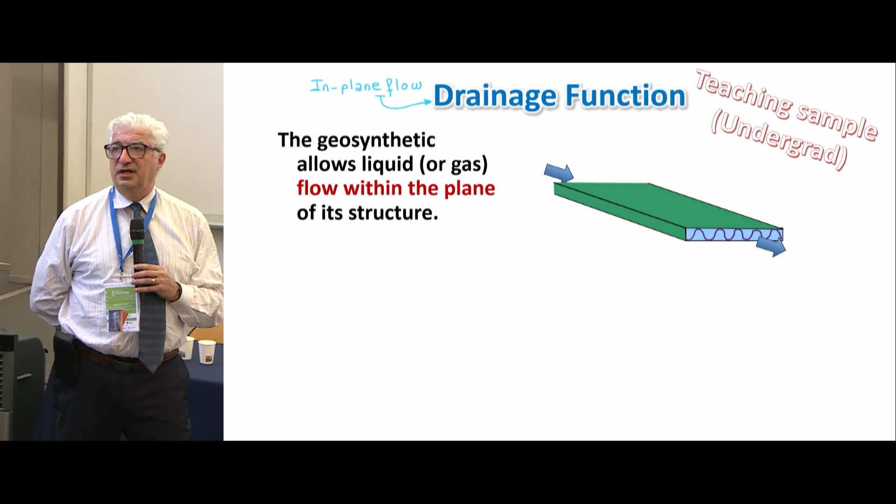For example, when covering topics such as drainage and reinforcement. I could say that reinforcing previously covered topics, even if it was in the same course, may bring additional opportunities for deepening the understanding. For example, here's a drainage function, but in this case, not of a gravel layer, but of a geosynthetic layer.

In some cases, students may get confused because we use different terminology to characterize the hydraulic properties. For example, those who are hydrogeologists may recognize the concept of transmissivity that we use to characterize a confined aquifer; it is the same concept that we use to characterize a geocomposite, which is the product of the hydraulic conductivity times the thickness.

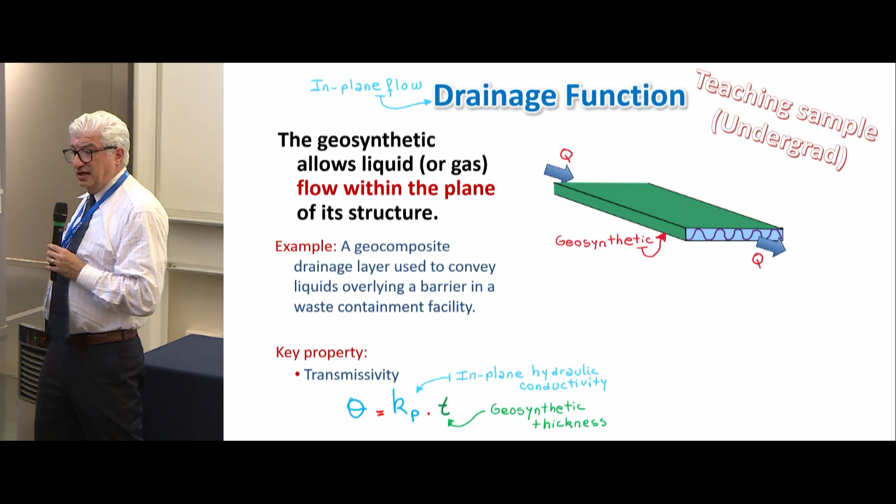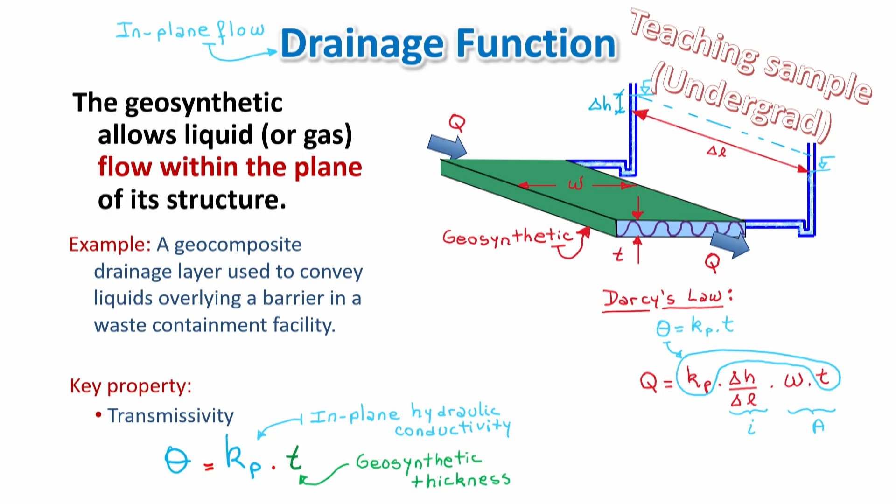So how do we incorporate this into Darcy's law? Here's our good old Darcy's law, the same that we use for soils, and we're going to use it for geosynthetics. But when we specify geosynthetics, we're going to try to get rid of specifying the thickness. And we do that by lumping the hydraulic conductivity with the thickness under the term transmissivity.

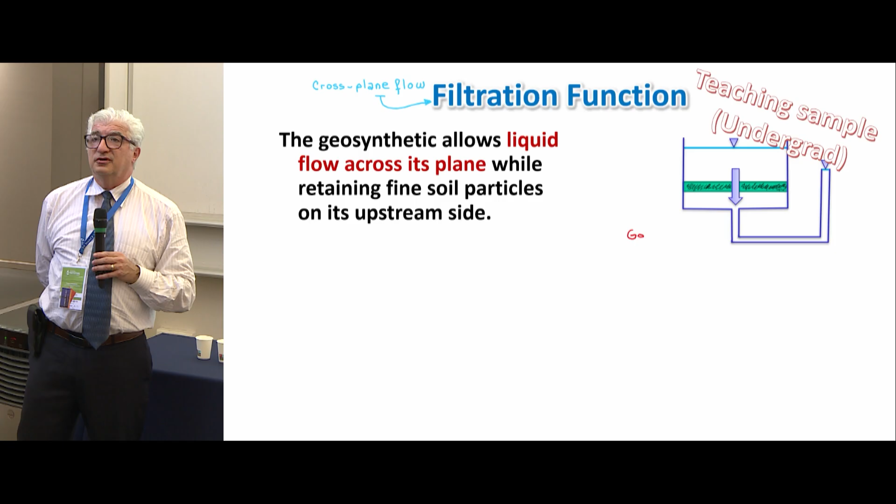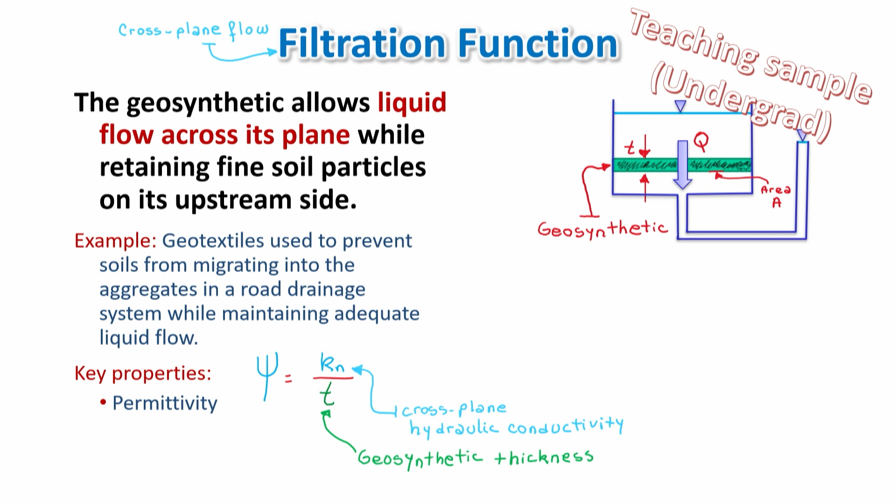This is Darcy's law expressed in terms of transmissivity. When it comes to a different function, a filtration function, that is the cross-plane flow, we are also going to make good use of the previously covered Darcy's law, but in this case using the concept of permittivity. We're going to normalize the hydraulic conductivity divided by the thickness. Why are we going to normalize it in a different way? The answer comes from Darcy's law.

So when we write Darcy's law in the case of cross-plane flow, the thickness becomes part of the hydraulic gradient. And that's why, when we rewrite Darcy's law getting rid of the thickness, we need to normalize the hydraulic capacity by dividing the cross-plane hydraulic conductivity by the thickness.

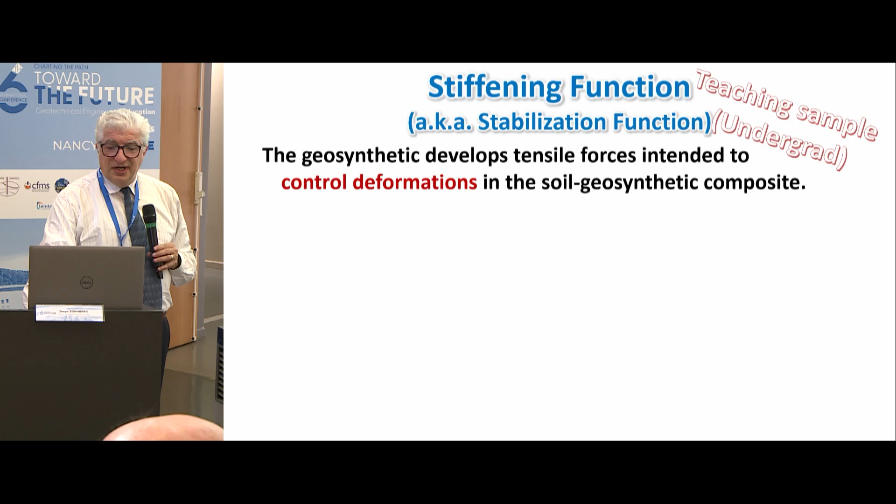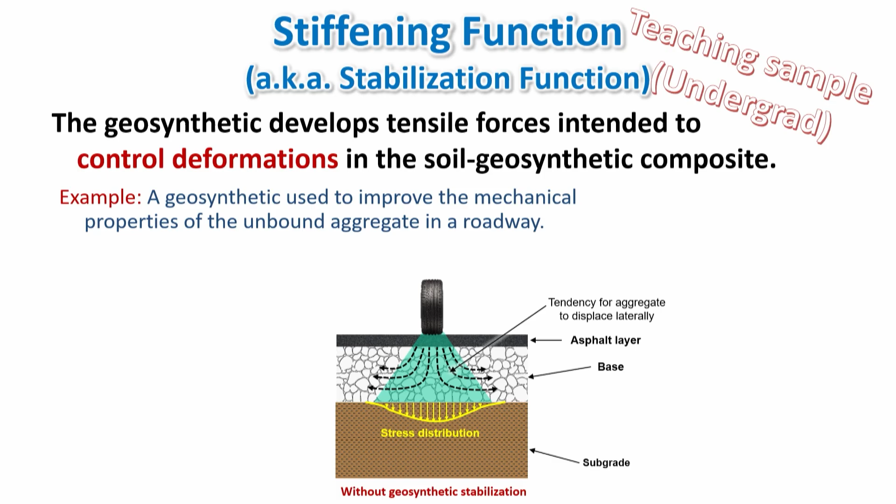Very good. And what about the mechanical side? The mechanical side is more complex to convey, but let me try. There is a concept of stiffening. Essentially, this brings the opportunity to remind students of how relevant confinement is when we deal with granular soils. So if I ask a student what is better for foundation purposes, a gravel or a clay, the obvious answer will be a gravel. And my reply would be, it depends. It depends on whether the gravel is confined or not.

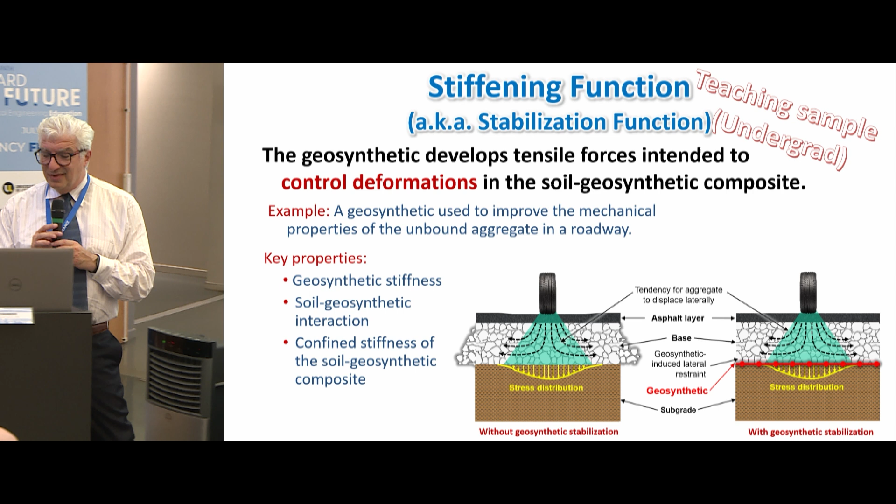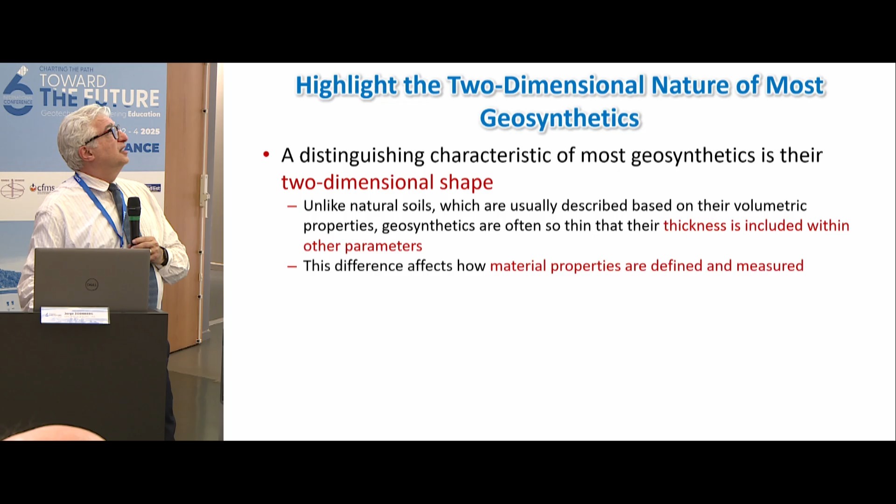And that is something that geosynthetics may help with, essentially to maintain the confinement of soils, and that's what we call stiffening. I'm going to walk you finally through the thickness of geosynthetics, that we need to recognize that geosynthetics are two-dimensional materials.

So in conclusion, I walked you through different components. One of them was the results of an international survey that provides insight on the distribution of geotechnical courses in the civil engineering program: significant uniformity in four-year programs, some discrepancies in five-year programs. The coverage of geosynthetics in both four-year and five-year programs is growing, but is definitely lacking.

When it comes to how to incorporate geosynthetics, the proposal here is to incorporate some basic knowledge on the material properties of geosynthetics very early in the program. Tapping into the concept of functions may be particularly relevant. Tapping into the concept of geomaterials as construction materials may be particularly relevant. And drawing the parallels between the core concepts in geotechnical engineering and the same concepts in geosynthetics engineering may be particularly relevant.